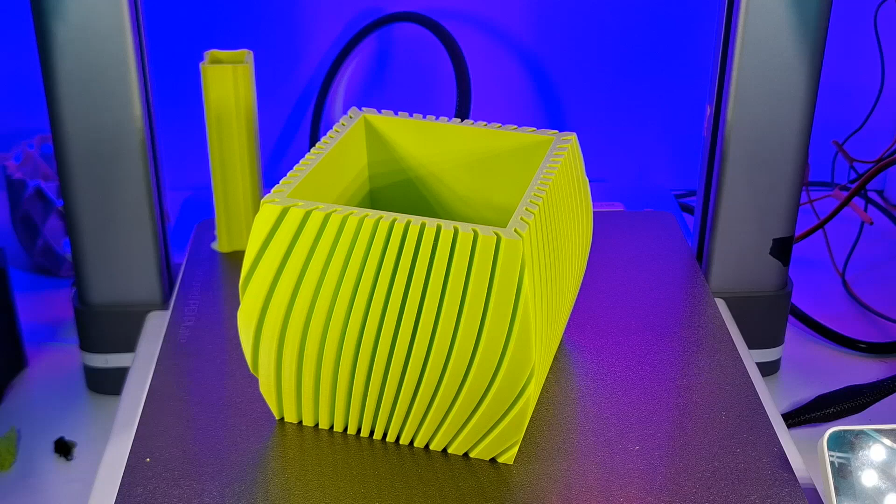I got a comment from one of my viewers asking how to make a square pattern plant pot. And honestly, it's a great idea. So let's build one together. So here we are in Fusion 360.

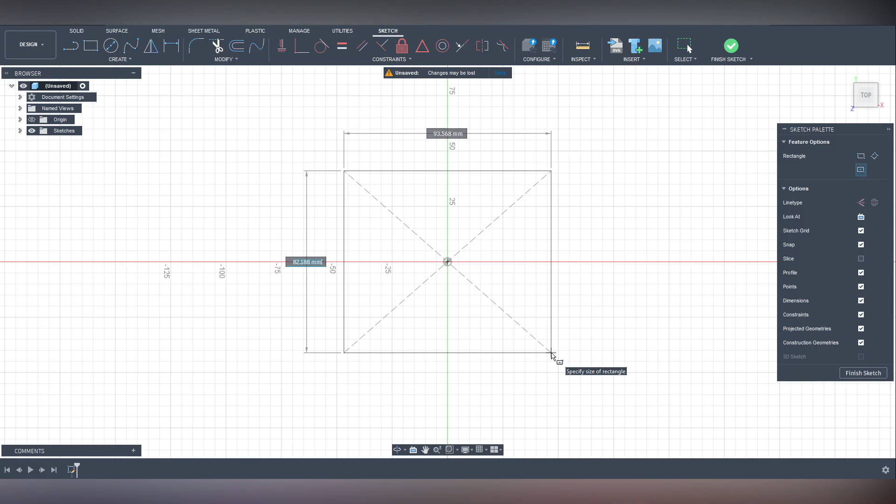I'm going to start by creating a sketch on the top plane. And I'm going to be creating a square. So let's make a square of 90 millimeters by 90 millimeters. And say finish sketch. Now with this square, I want to double click on the line and go to create a form and create an extrude.

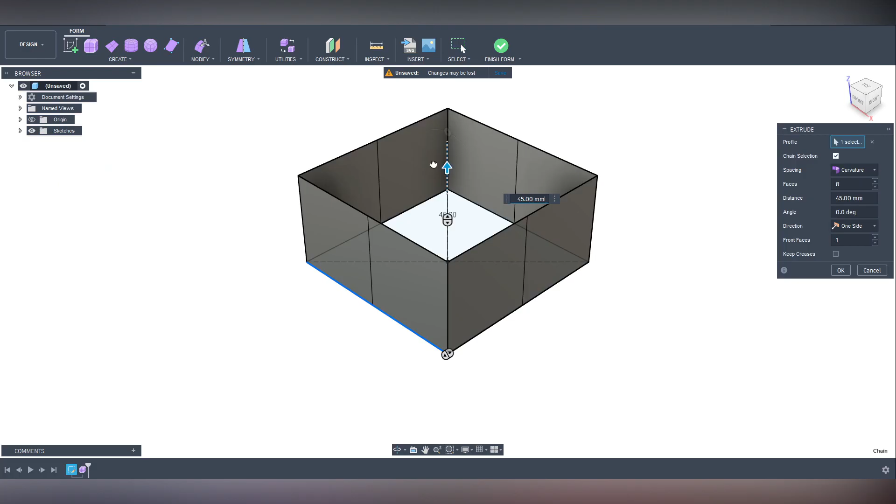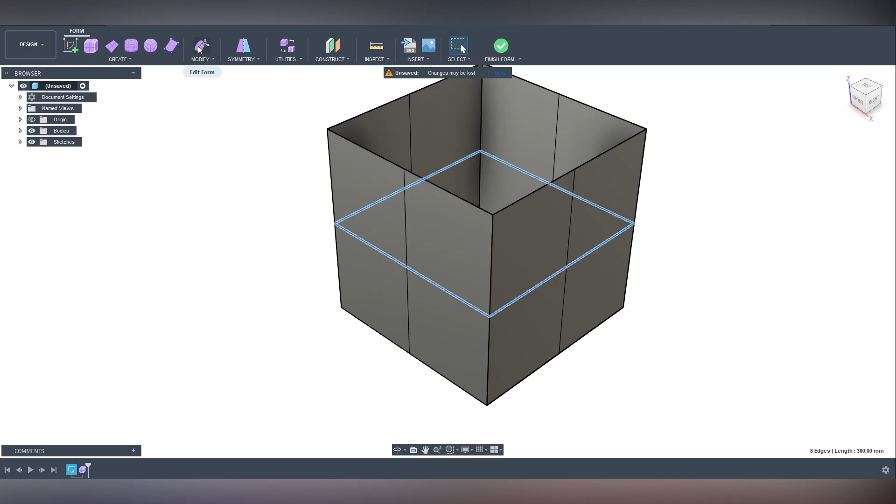And this extrude is going to be 90 millimeters again. So we're going to make a cube basically. But I want to create another face on this cube. So I'm going to click 2, say OK. Now with this one, I want to double click the middle of the two faces and modify it. I want to make it a bit bigger just to give it a little bit of an interesting shape to this plant pot. Okay.

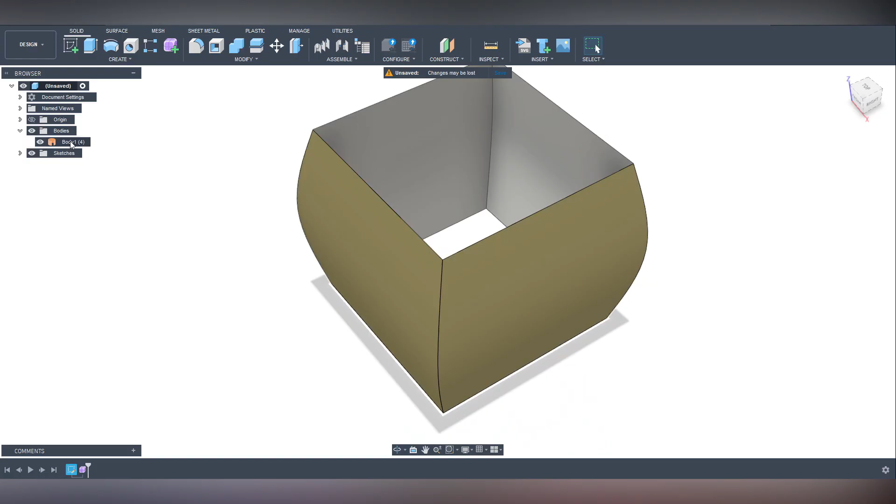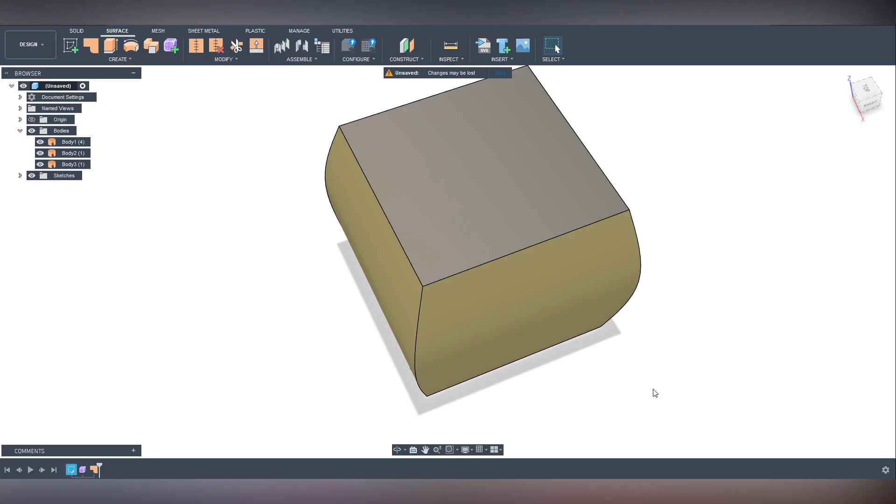Now let's finish form. And at the moment, my body is just a shell. So I want to create a closed body. So I'm gonna go to surface, select patch. I'm gonna click on one of these edges to patch the bottom and click one of these edges to patch the top. Okay.

Now one more thing we need to do to create a solid body is we need to connect these three sections, because at the moment they're not connected. So we're gonna just select everything, make sure everything is selected, go back to surface and stitch everything. Say OK, and now you see we have a solid body.

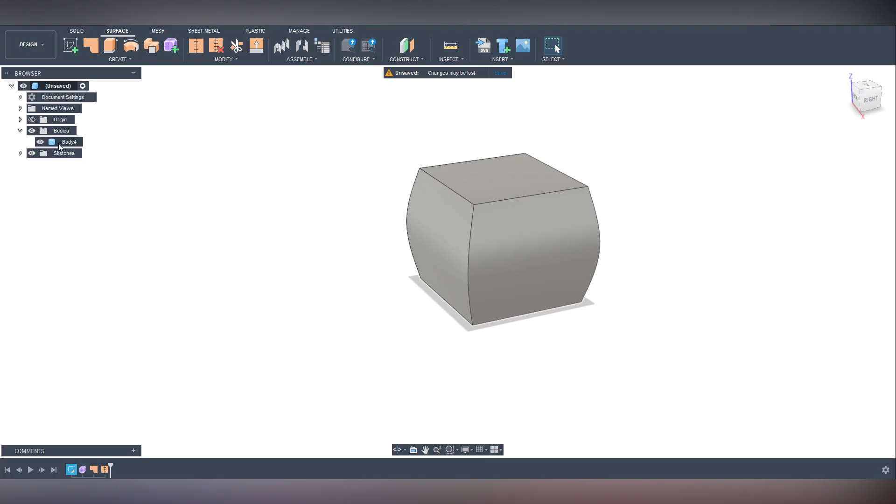Now I want to create a copy of this body, which I'm gonna use to create the pattern from. So I'm simply gonna copy this body, Ctrl C and Ctrl V, and say OK. Now I have two bodies exactly the same size and exactly the same shape in exactly the same position. I want to rename these bodies so I know which one is which. And I'm going to rename this one as pattern.

And I want to rename this one as pot. So this is going to be the one I'm going to create the pattern from, and this is going to be the pot where I plant my plants. Okay, so let's hide the pot at the moment.

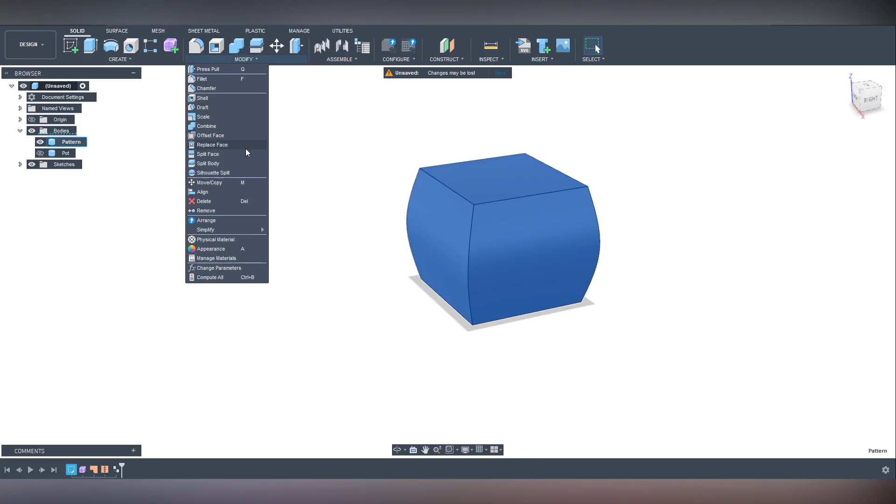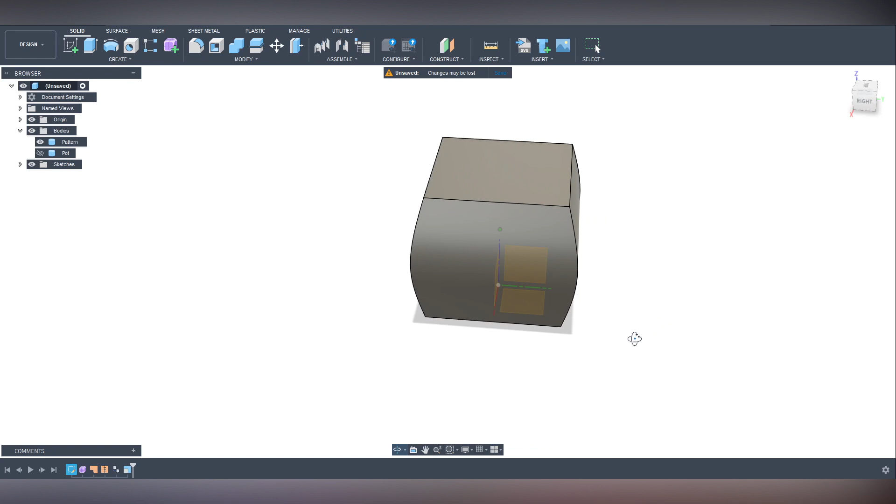And what I want to do is take the pattern body and scale it up a little bit. And I want to choose the scale point, the origin of the whole design. So I'm going to go from 0 and I'm going to say scale factor 1.1. Okay, enter, and that's going to give me the same shape, and I have two bodies, one bigger, one smaller.

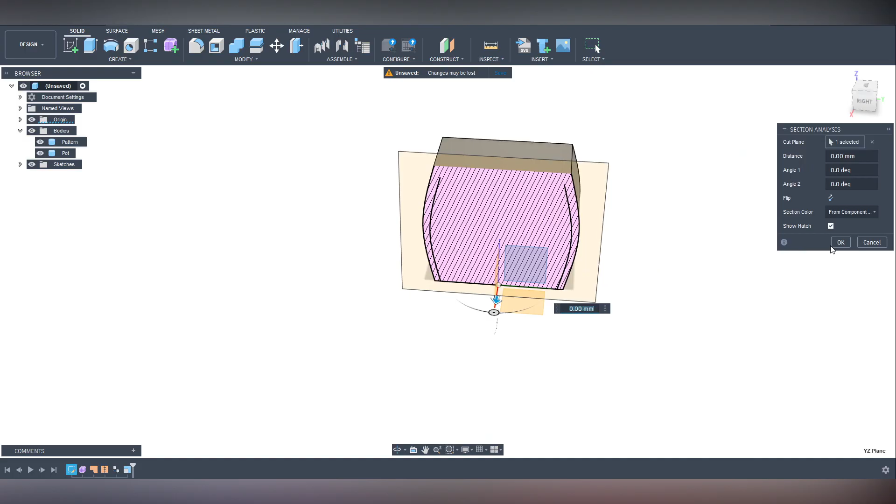So if we look at the section analysis, I always use this because it's such a cool way to see inside of things. So I'm just going to go to section analysis. I'm going to look at this plane. Okay, so that gives me all of this. So you see at the moment I have the bigger shape, which is the pattern one, and I have the smaller one, which is the pot.

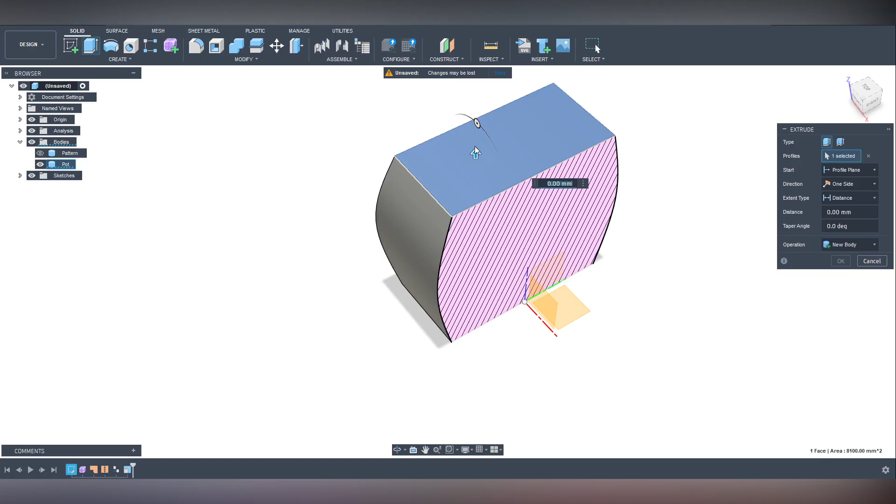Okay, so one thing I want to do now is hide the pattern one and then go to the top of this and extrude by, let's say, 20 mil. Okay, there we go. And as you can see now, I have a cut on the top of this that gives me a clear cut at the end when I'm going to cut all the patterns out. You'll see what I'm talking about in a minute.

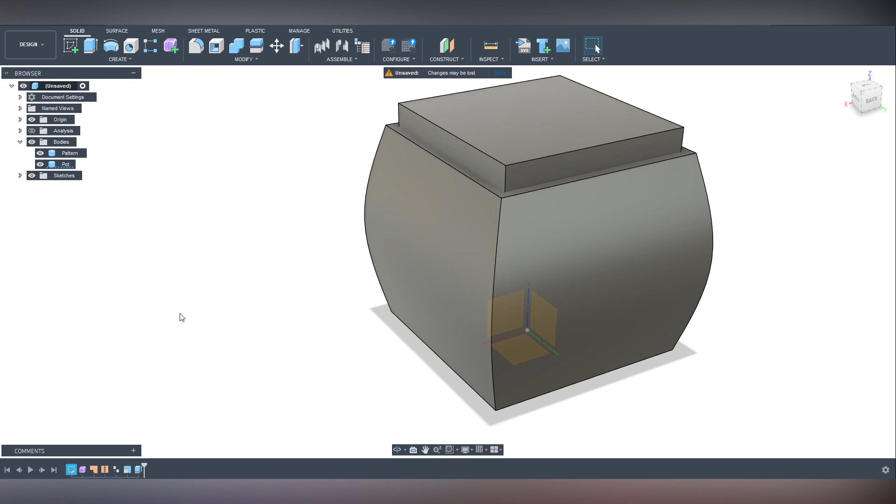Right, so I'm finished with the pot for the moment, so I'm going to just hide it. And I just want to work on the pattern. So onto this pattern, I'm going to hide this as well. And I want to create on one of these planes, doesn't matter which one, choose one, and I want to create a sketch.

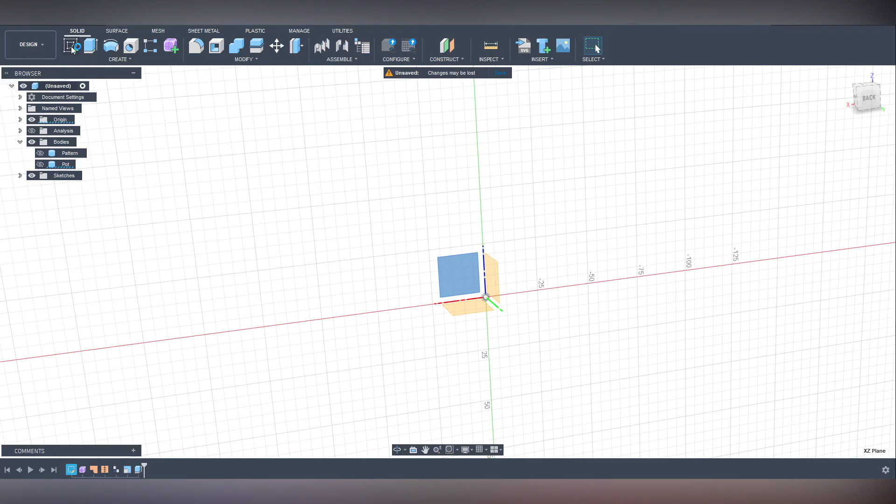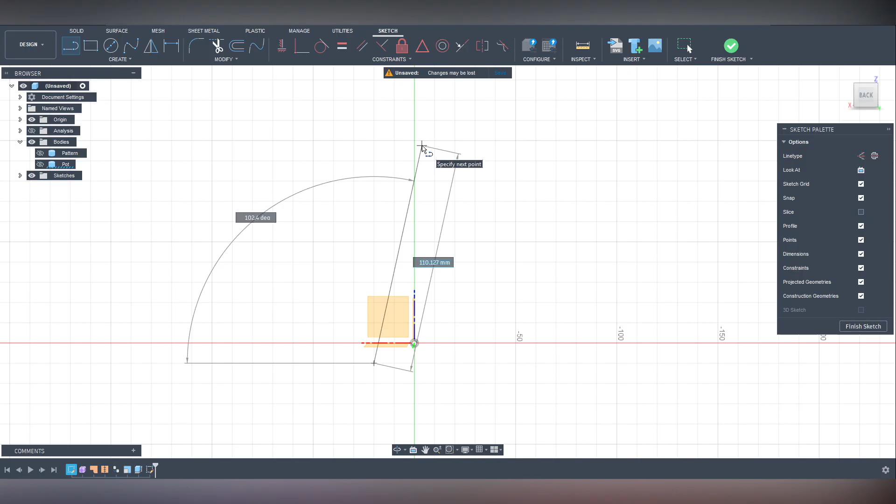Now, on this sketch, I'm simply going to create a line that goes from, let's say, somewhere here, as long as it passes the x-axis, it's fine, and I want to make it somewhere about 100 mil high. Okay, so with this line, I'm simply going to offset it by 2 millimeters, and I want to close it to create a profile.

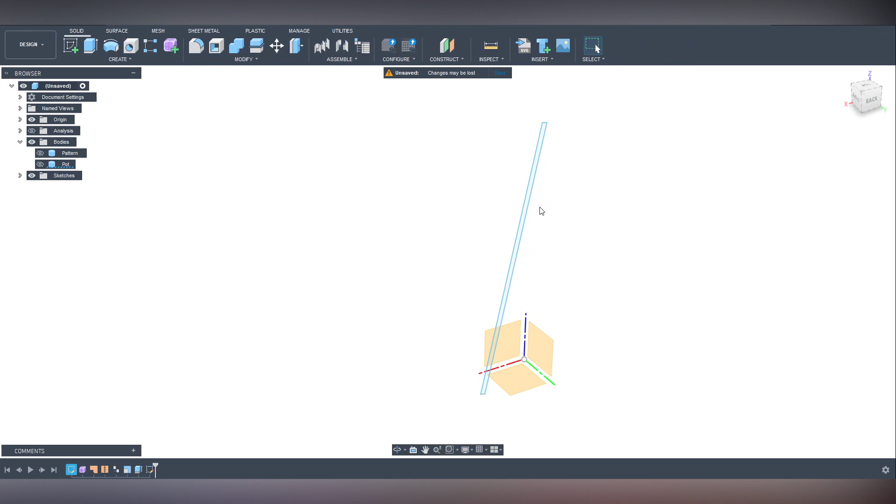There we go. So now I have a profile that's right in the center of this, and I want to extrude this profile, let's say 100 mil. Okay, and let's call this a rib, so we know what we're talking about.

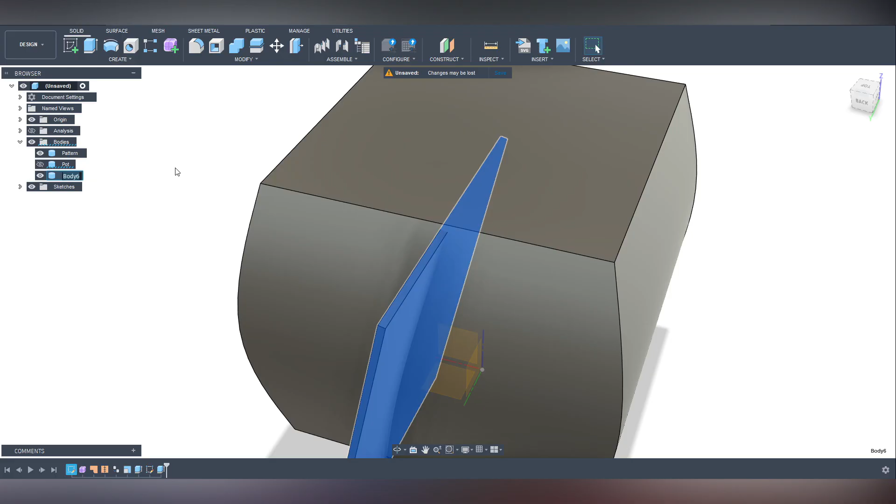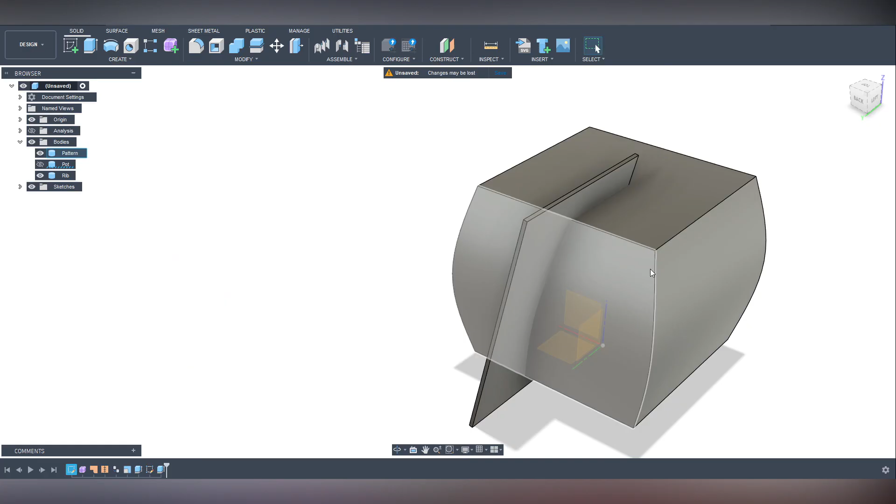So now I want my rib to go higher than the top of the pattern. So I'm simply going to select the top of the rib, and it's going to say pull, and I'm going to go just a bit higher and say OK. There we go. So now I can use this rib to make a lot of cuts into this pattern body.

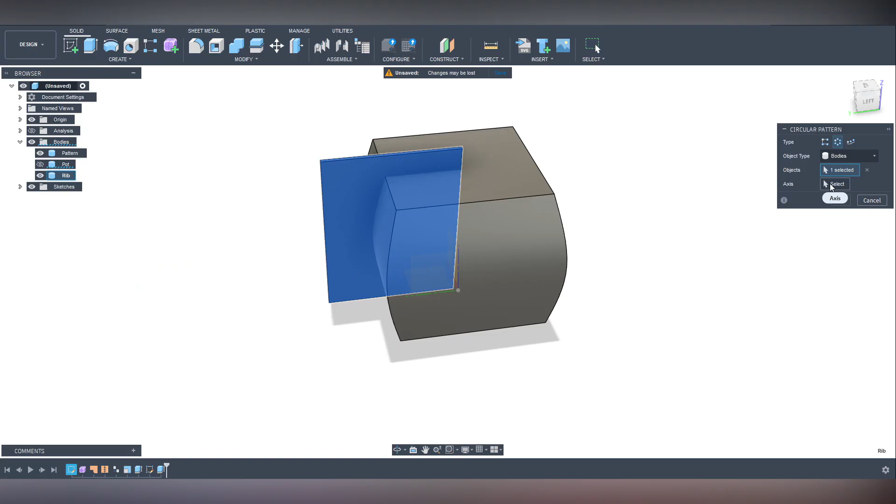So the way I'm going to do that, I'm going to select the rib, and this is where your computer power makes a difference. If your computer is not strong enough, it's going to take a while to calculate all the patterns, because we're going to do a lot of them. So in my case, I want to create a pattern, and I'm going to choose a circular pattern, and the axis, I'm going to choose the Z axis.

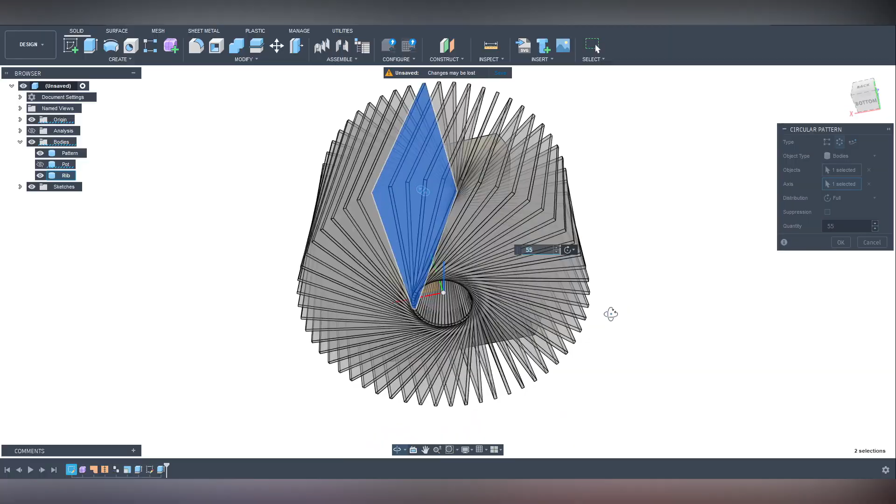Now by default it's going to give me 3, but 3 is just not enough, so I'm going to go somewhere about 55. Okay, that gives me a whole bunch of them all the way around that body of mine. Okay, so now if I say OK, that's going to give me a lot of ribs. So I'm going to have the first one which I created and all of these other ones following.

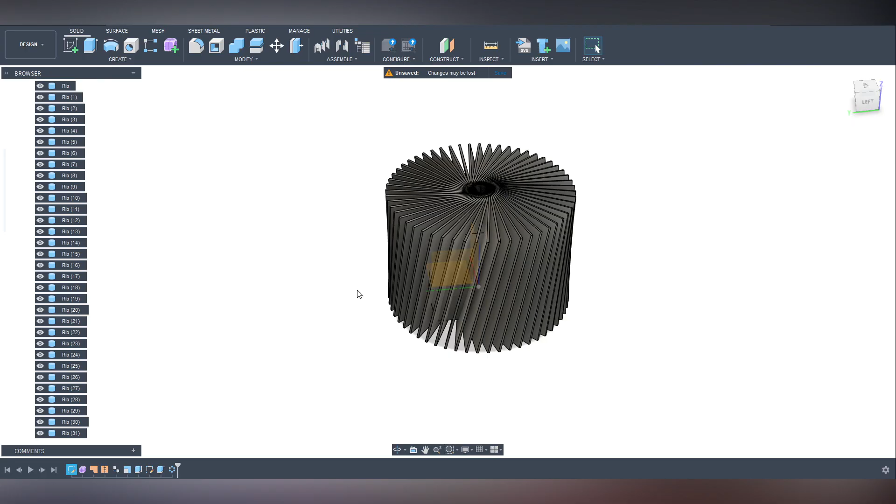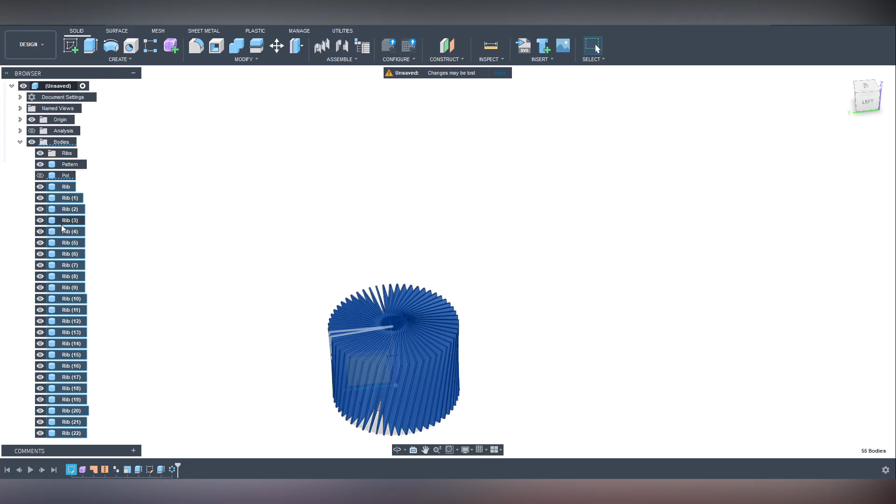Now I have a lot of ribs here, and I want to be able to work with them easier, to make them visible and invisible quicker. I'm simply going to create a new folder, and I'm going to call this group ribs. And I want to select all my ribs from this list, holding Shift, and I'm going to move them all into this folder. Now I can simply hide them as I need to, all of them at the same time.

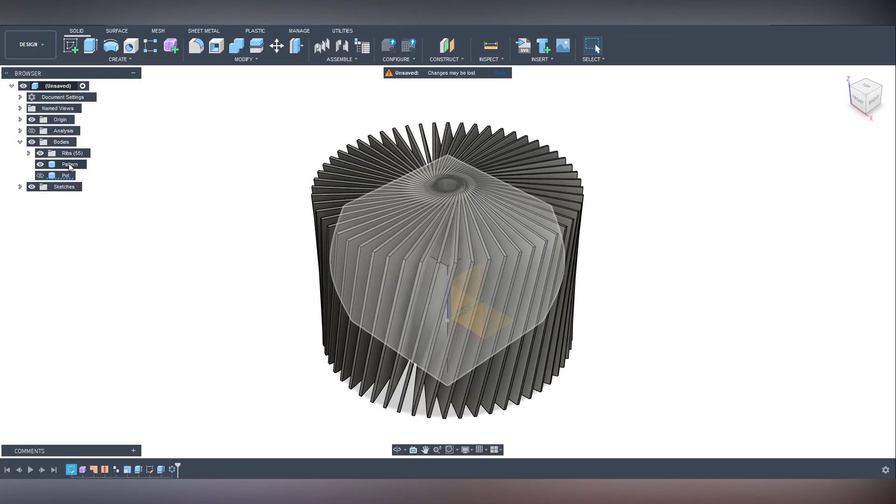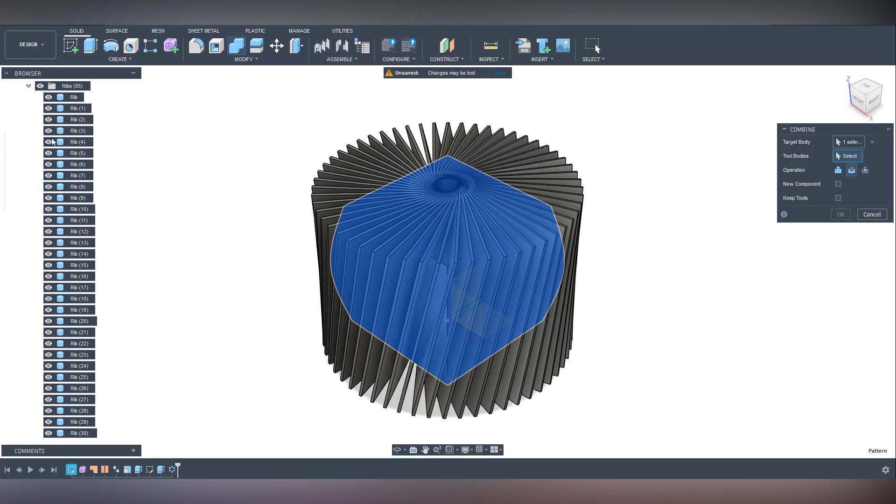So let's create the pattern which we were talking about. I'm gonna select my body, and I'm gonna go to combine, and in my case I want operations to be cut. My target body is gonna be the body I just selected, which is the pattern, and my tool bodies, I can click here, select, and I want to select all of them. And this is where your computer makes a difference.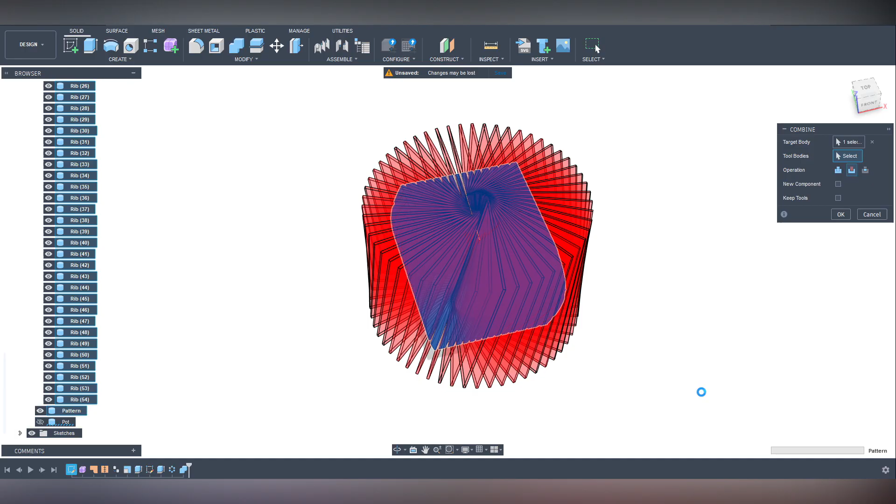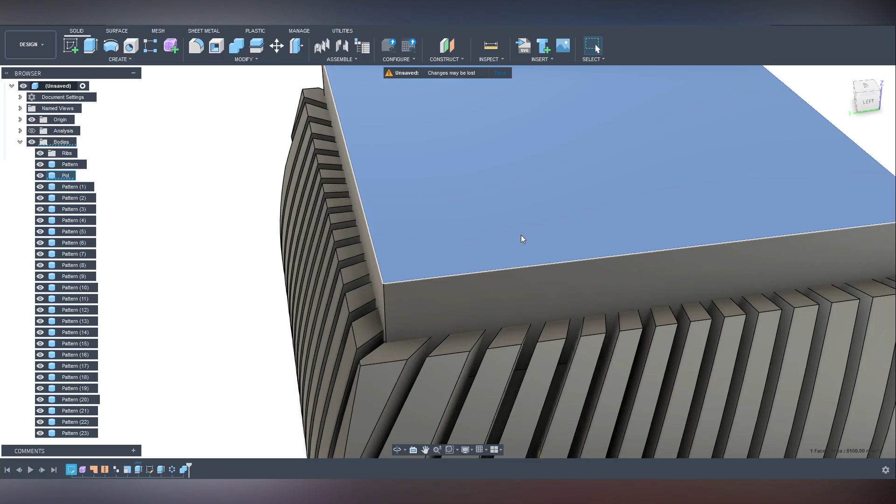Let's get back to designing. And there we go. This is our pattern so far on our plant pot. And what's going to happen now is, if we look at the plant pot we have designed before, first of all I want to make it the same height as this, so I'm going to just click on this top one and just say extrude up to this point and say OK.

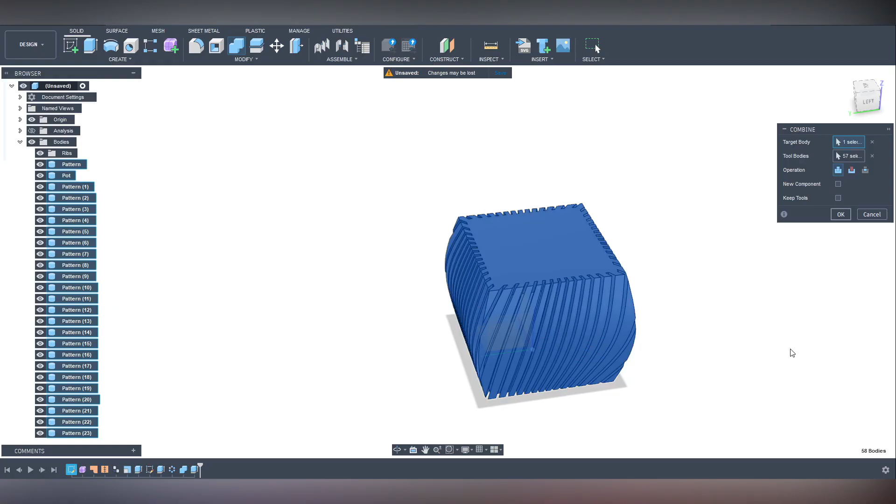Now we want to combine everything, so I'm simply gonna go to combine, target body 1, select all of the other ones, and say operation join, and say OK. Now we have one object only at the moment, and I think that looks really nice. And the only thing we need to do now is create space where we can pot our plant.

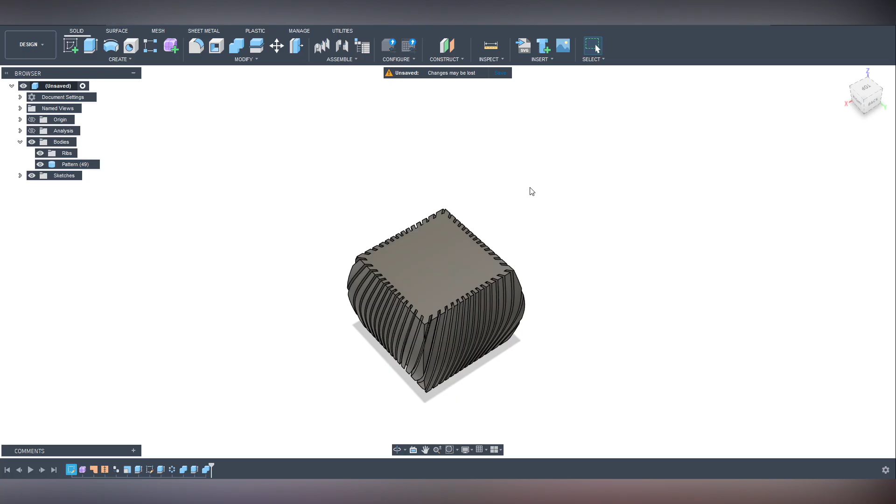So let's do that. Let's create a new sketch, and I want to create it on the top again. And I know my plant pot size is gonna be 90 millimeters. So I'm gonna simply create a square of 85 by 85 mil. Okay,

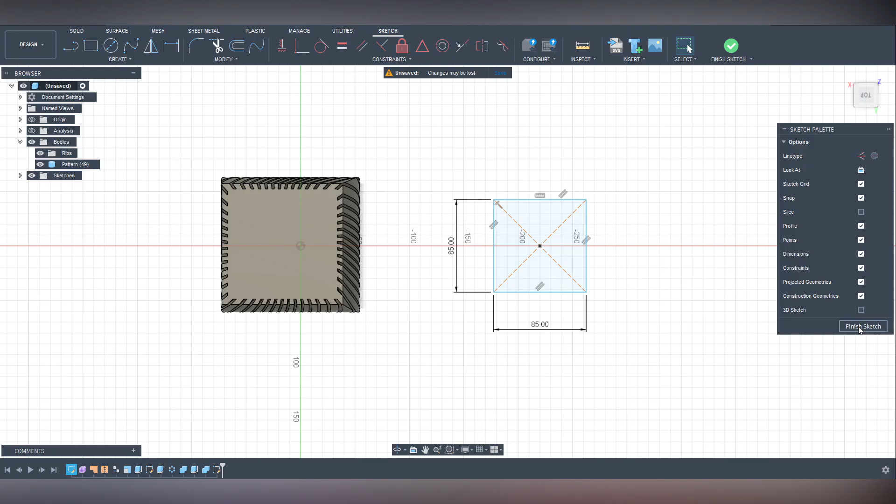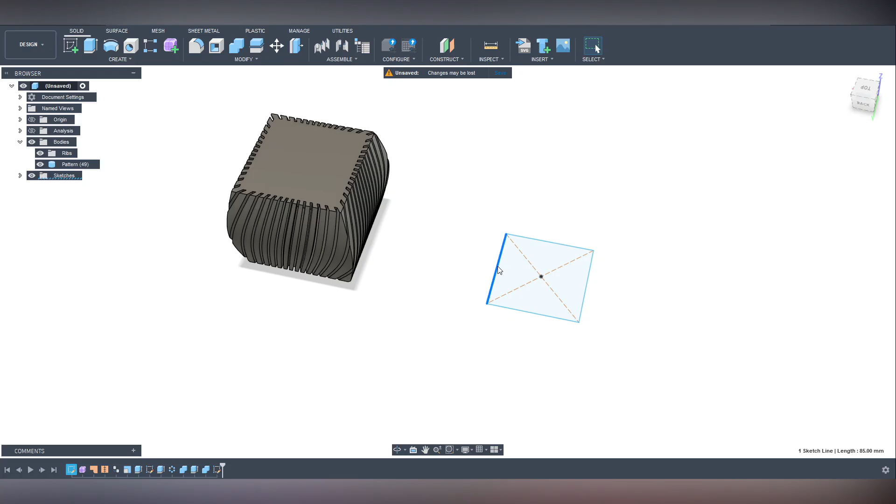so let's finish sketch, and let's create something very similar to what we've done before, but in this case I want to just make the inside of the plant pot taper down, so when you repot your plant in the future you won't struggle to take it out from the pot. So I'm just going to simply double click onto this, create a form, extrude, and I'm going to extrude by 100.

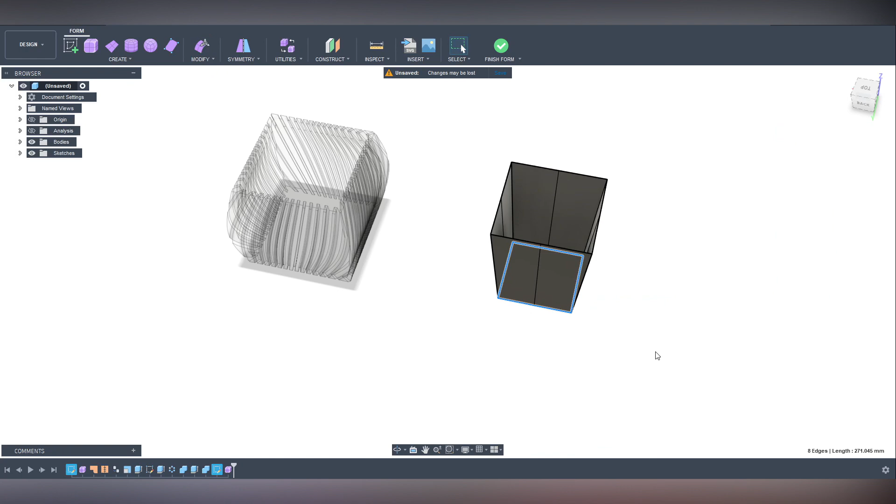Okay, and I'm going to take the bottom section, I'm going to modify it and make it slightly smaller, so it's going to be tapered. Okay, now if I finish this form, I can go back, do the same thing like I did with the other ones, close the top and the bottom, say OK. If I select everything, I'm going to stitch them and create another body.

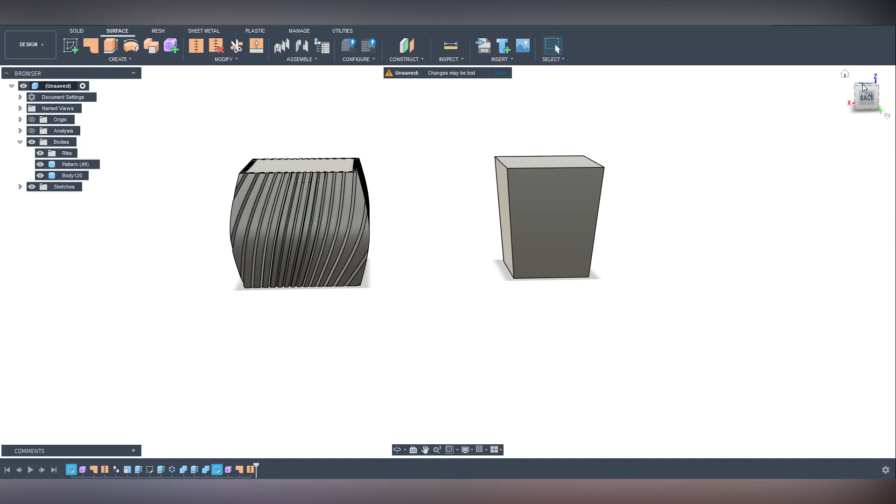Now I can use this body to cut a hole into our plant pot. So if I go to the top view and I'm going to look at the orthographic view, I'm going to select this body and move it on top of this one. There we go. Say OK. And with this body,

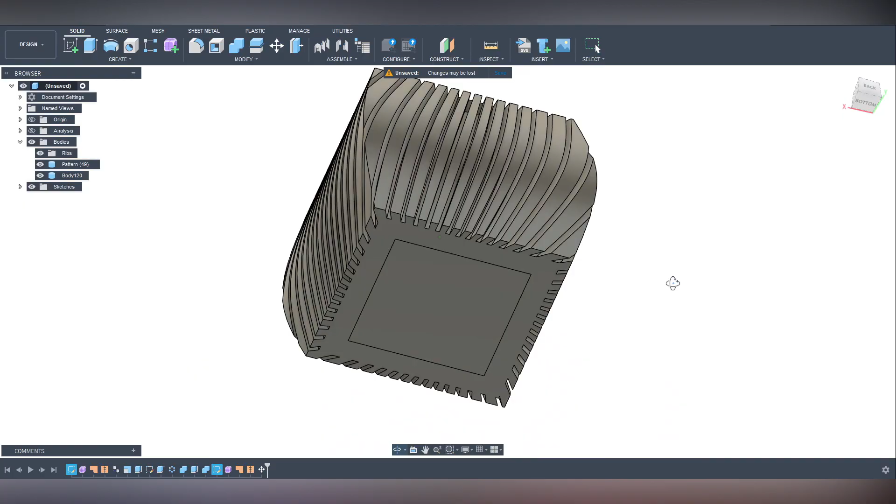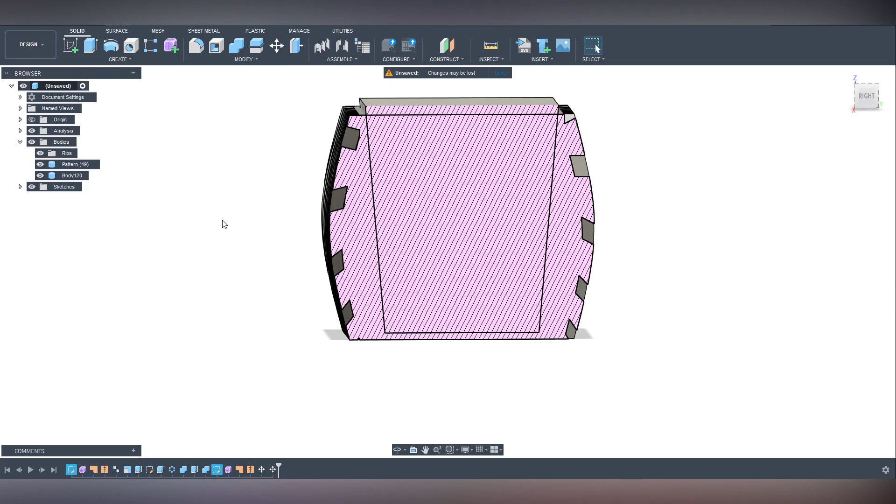if I look back at the analysis, you see I don't have any space on the bottom. So this one, if I cut now, it won't have any bottom. So I'm just gonna select this body and just move it up a bit. So I want to move it up by 3 mil. That should be fine. Okay. And now I want to cut some out of this.

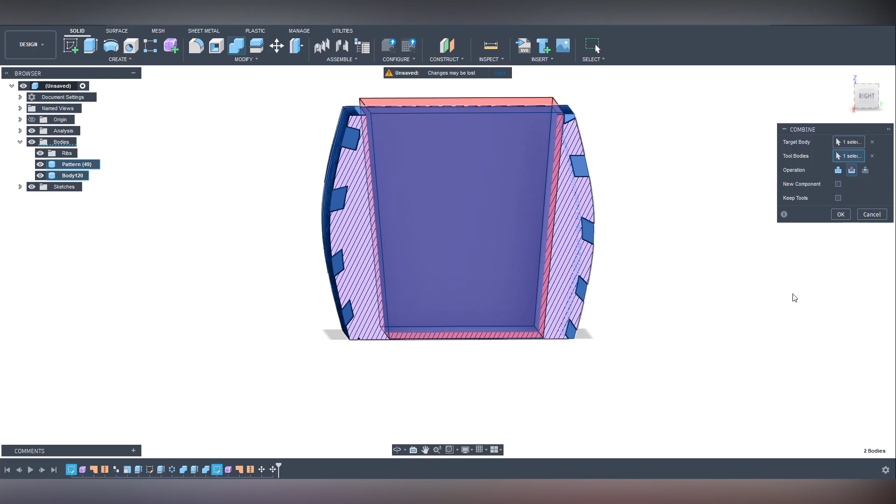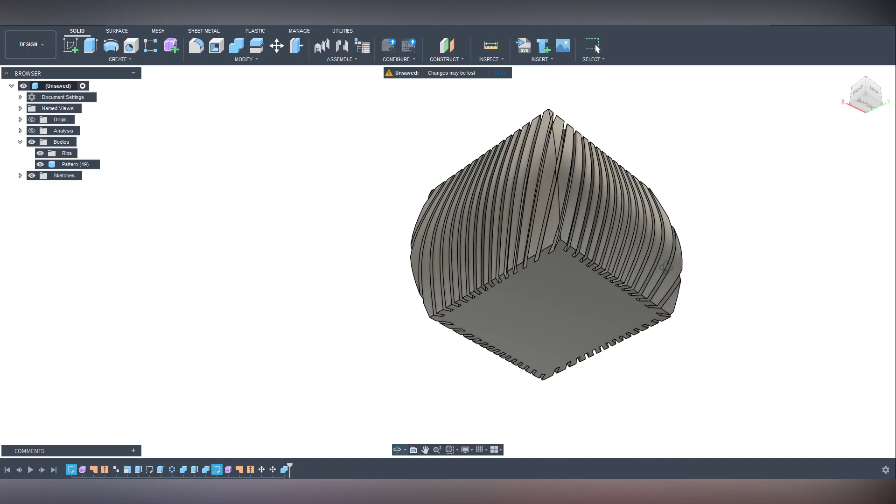So I'm going to go back to my pattern body. I'm going to combine. And I'm going to select the tool body, this. I'm going to select cut. Okay, and that gives me a nice cut into this. Right, so if I hide the analysis again, there we go, we have a nice looking plant pot, a square one with some patterns on it. Very simple to make, and I think it looks really nice.

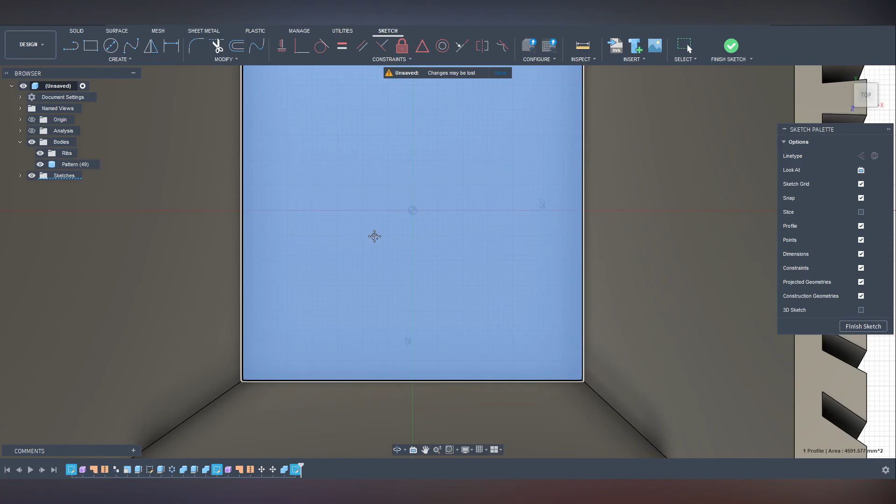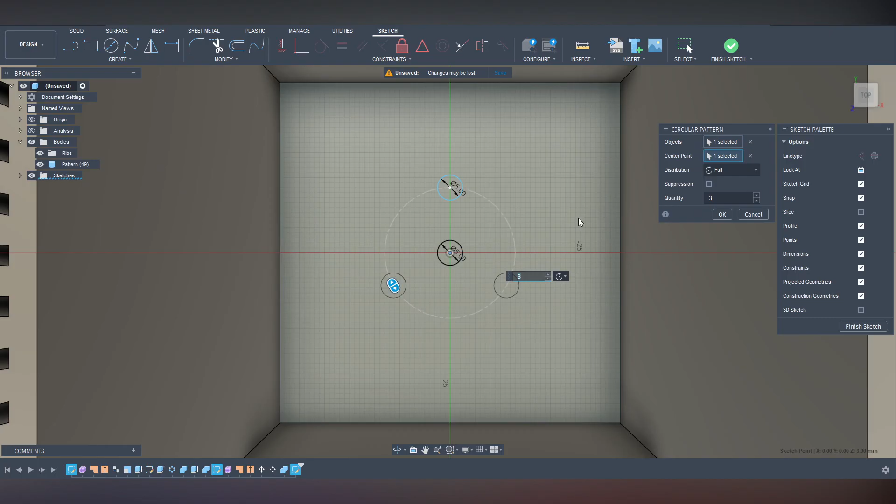Now one thing I want to do before I send it to 3D print, I want to create some drain holes on the bottom, and I'm going to simply create a sketch on the bottom of this pot, and in the middle I want to create a 5 mil hole, and I want to create a few more around it. So I'm going to make another 5 mil hole, and I'm going to select this, and I'm going to create a circular pattern with a center point here, and I'm going to say 3.

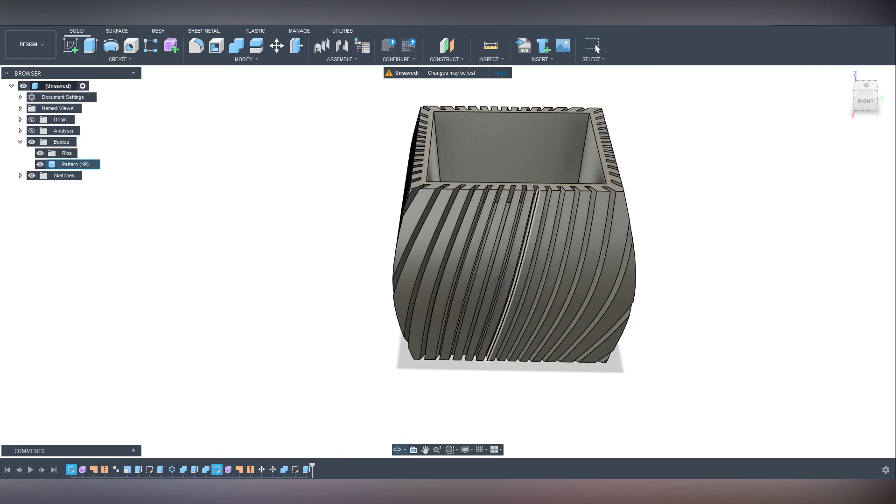Okay, now if I finish sketch, I can simply select everything, and I can extrude everything down, and that's going to cut some holes into the bottom of my plant pot. That's going to give some drainage so you don't drown your plants. Okay, I'm pretty happy with this. I think it looks really nice,

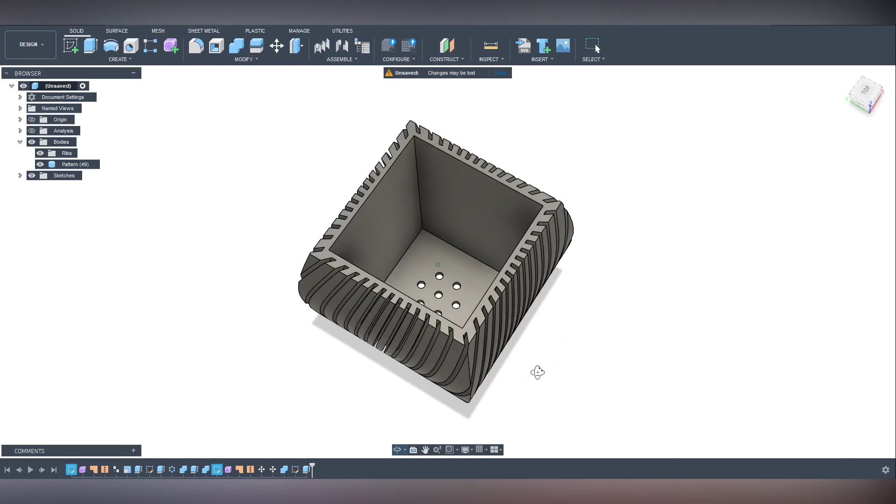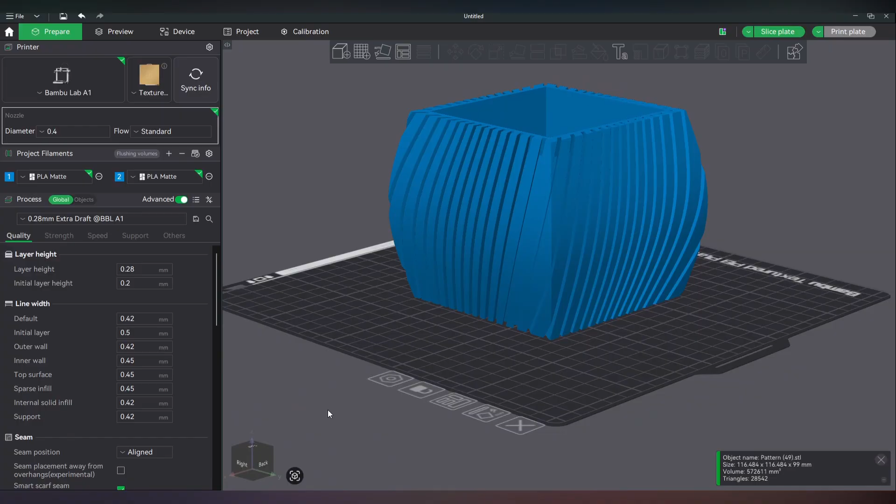Let's send it to 3D print and see how it looks like. And there it is, guys. It's quite a big pot, this one, and I think it looks really amazing. And yeah, hopefully my subscriber likes it.

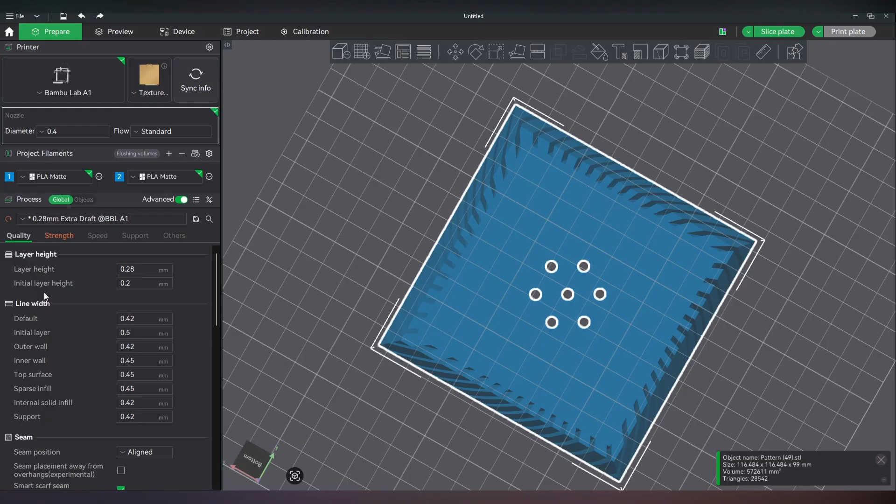So a few things I want to do to my pots before I start printing them. One thing, I like to create a pattern on the bottom. Even though nobody sees the bottom, it's just one of those things I really like to do. So I'm gonna go to bottom surface, and instead of monotonic, I'm gonna go to octagram spiral. I want the layer height to be 0.2, and I want my top surface to be concentric.

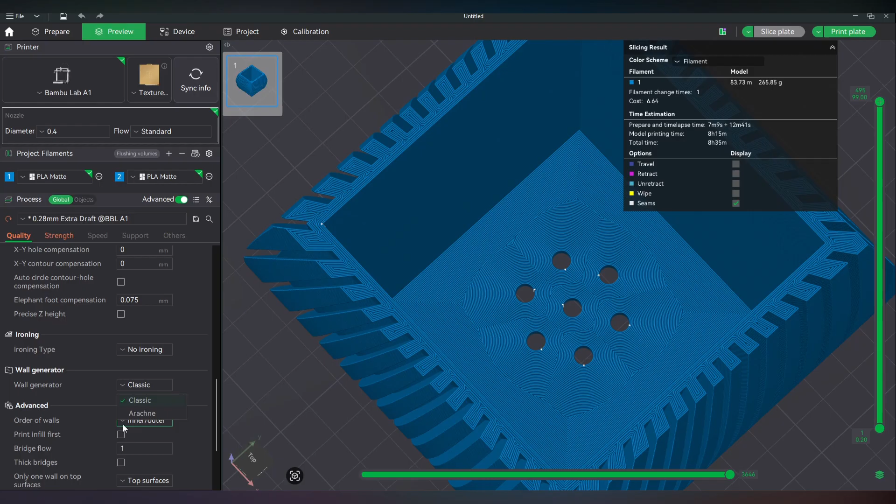One other setting I want to do to my pots is when I print something, usually I like to print with the walls. Instead of classic, I want to change to Arachne. And that's gonna cut some of the time because the printer changes the thickness of the line when it needs it. So that's gonna make it print a bit faster.

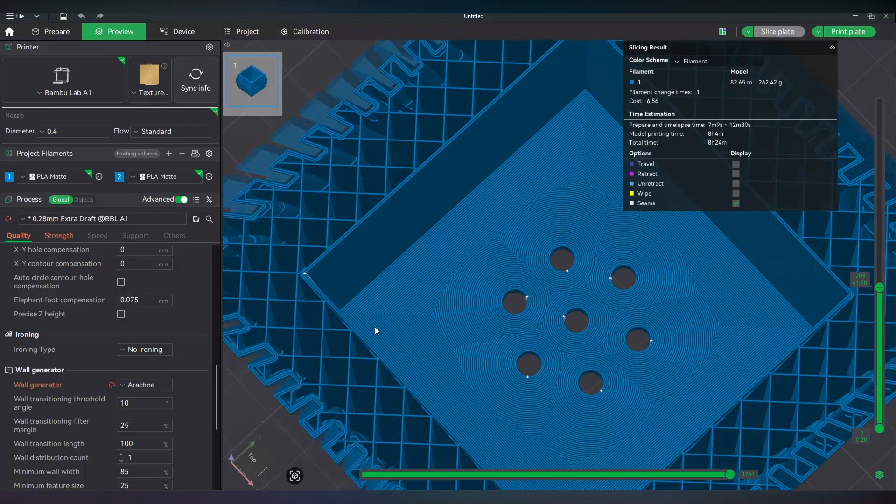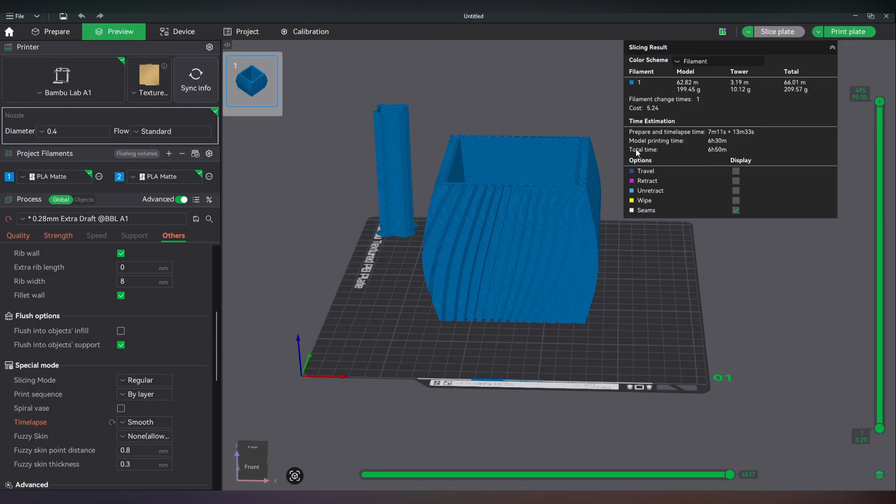Because this is such a big pot, I don't need to have that much infill. So I'm simply gonna go and cut some of the infill out. So I have sparse infill at 15% at the moment. I'm just gonna put it at 5, and I think that should be fine. So with the time lapse activated, I'm gonna go to a total time of 6 hours and 50 minutes. And I'm pretty happy with that for the size of the pot I'm making. And yeah, let's print it and see how it looks like.

And that's it, the plant pot is ready.